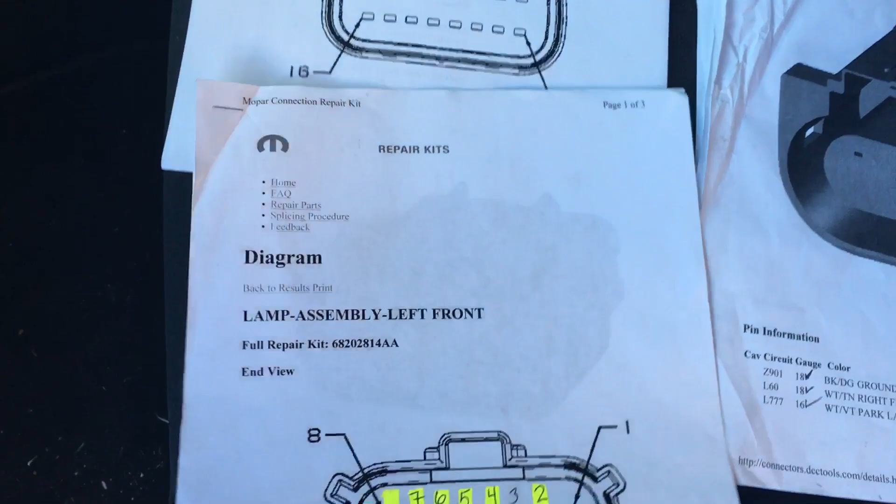I got a lot of requests to do this video, and here's what you're going to need. You're going to need to go into your Dodge dealer, into the parts department, and you want to have the VIN number to any 2015 plus model Challenger.

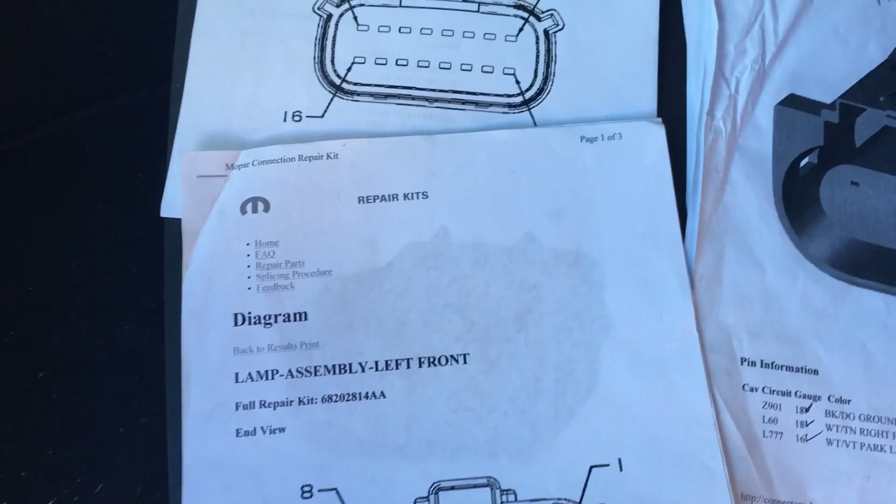It could be a Hellcat, SXT, or RT—whichever one has the same setup as your headlights. Meaning if you have an HID headlight setup, make sure you get another Challenger with a VIN that has HID headlights. Or if you have a halogen setup, same thing.

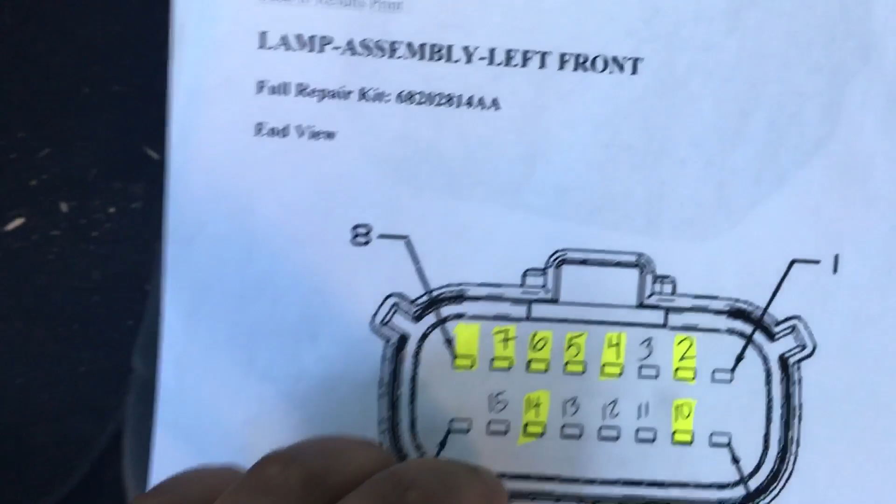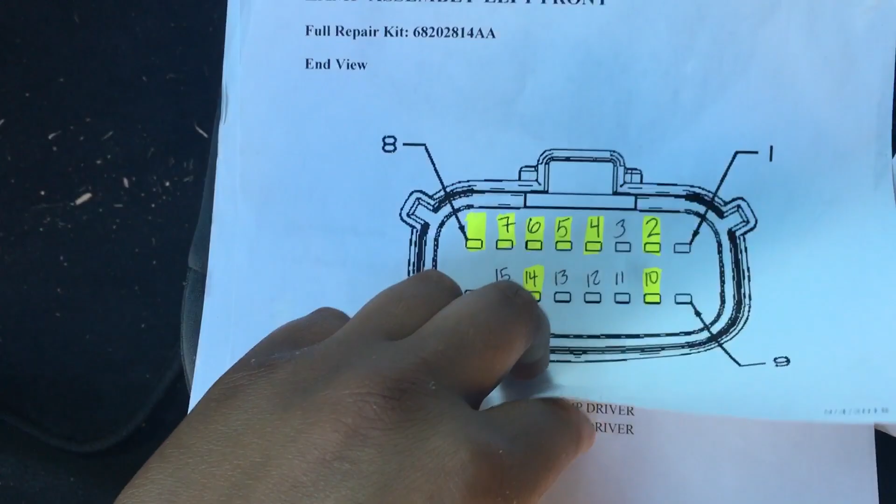You're going to go inside the parts department and look up these parts here. For the headlights, this is for your 2015 plus model Challenger. You want the full repair kit for the headlight. What this does, as I've highlighted here, is give you a breakdown of which each and every wire does for the new headlight, with the color breakdown and so on.

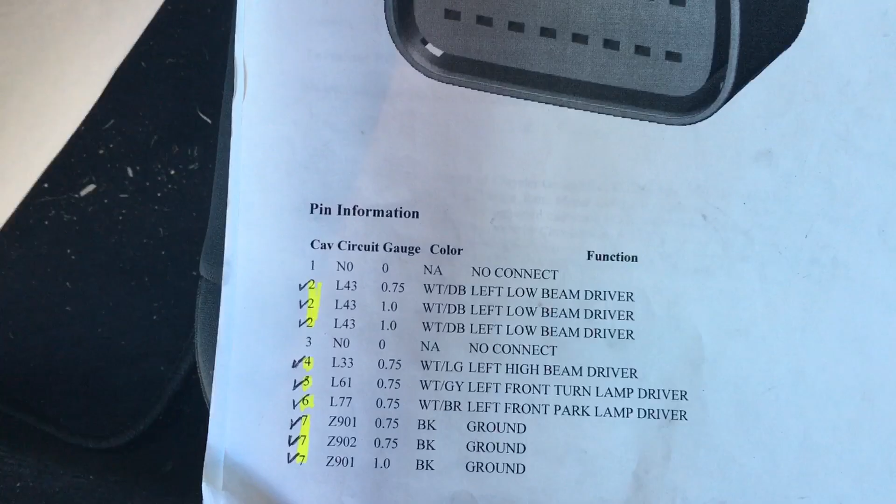I checked off which ones I needed, which ones I didn't, and when I wired it together, I did a little extra check mark to show that I was completed with that wire.

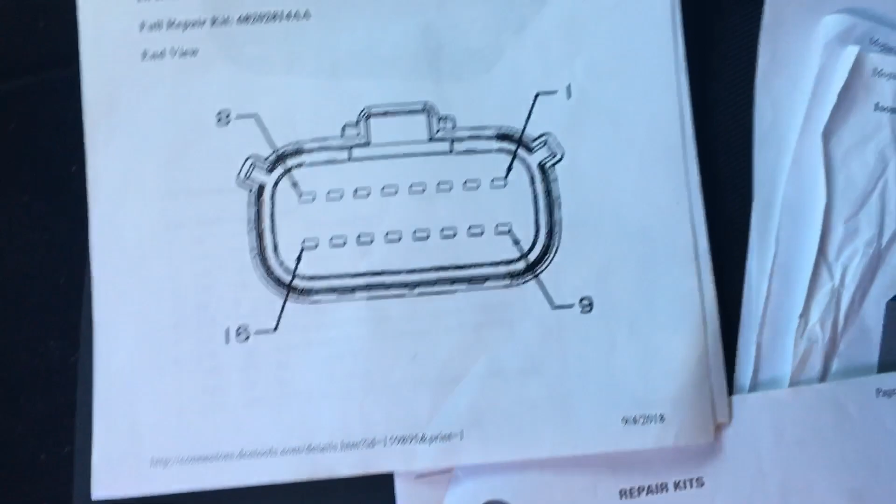So you're going to need the repair kit for the headlights you want to wire to. Then you need the actual headlight assembly, plus your older Challenger's headlight assembly or wiring kit, or repair kit. It's basically a simpler breakdown of which wires do what.

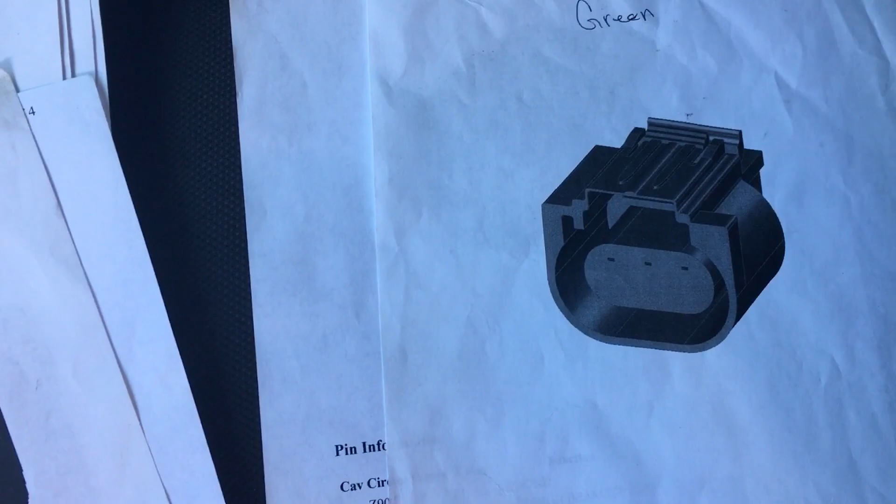Your setup may or may not look like this, but you have a black plug which goes on the front right and a green plug which goes on the front left—or I believe that's how it goes, either front left or front right. You have a black and a green plug that go on the front of your old harness, and these actually go together.

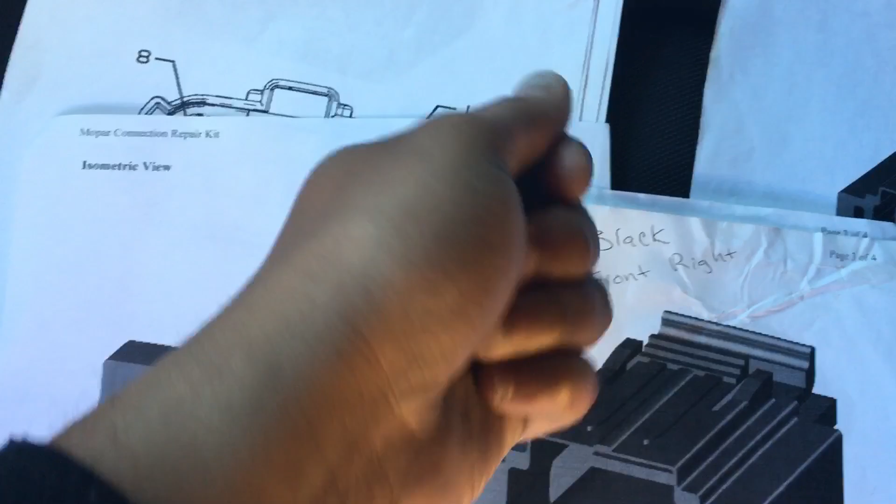One plugs into the amber lights, which are your turn signals, and one plugs into your headlight, which is your high beams and other things. So this is a breakdown of which each plug on each headlight does.

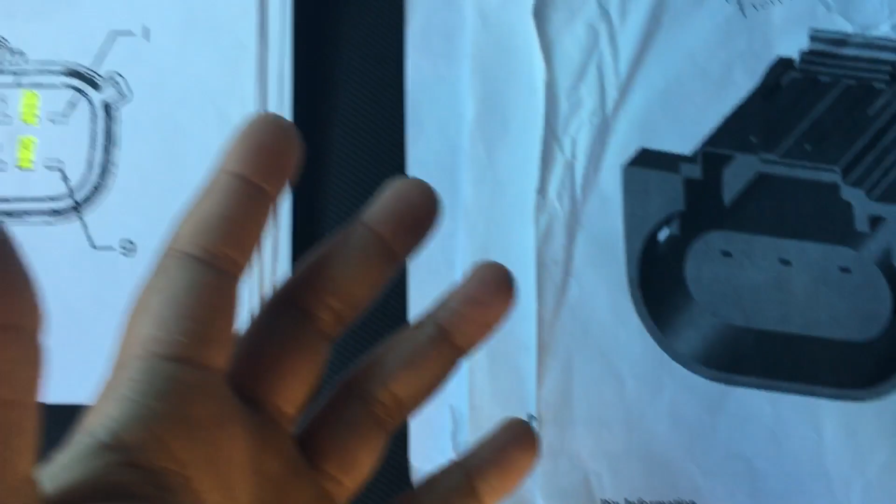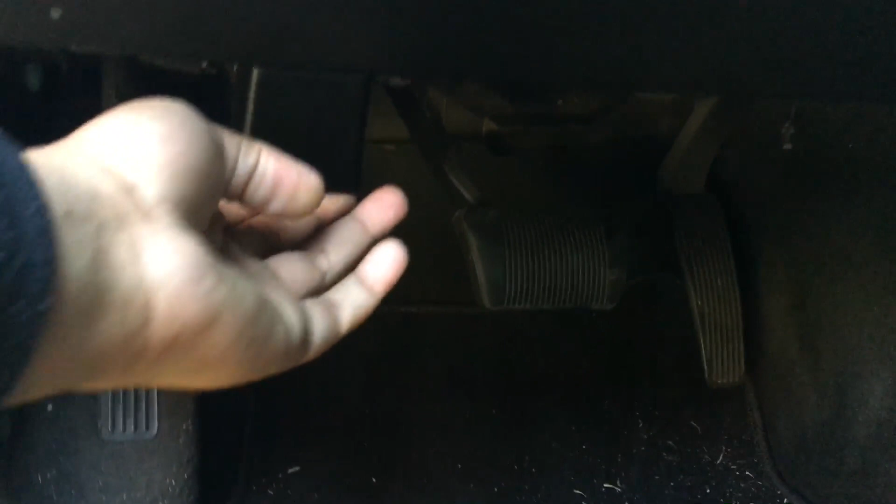I wish I had a picture to show you, but if I do, I'll insert it right here. So I'm going to go ahead and pop the hood to show you what I've done so far, and if you have any questions, I'll do my best to answer them.

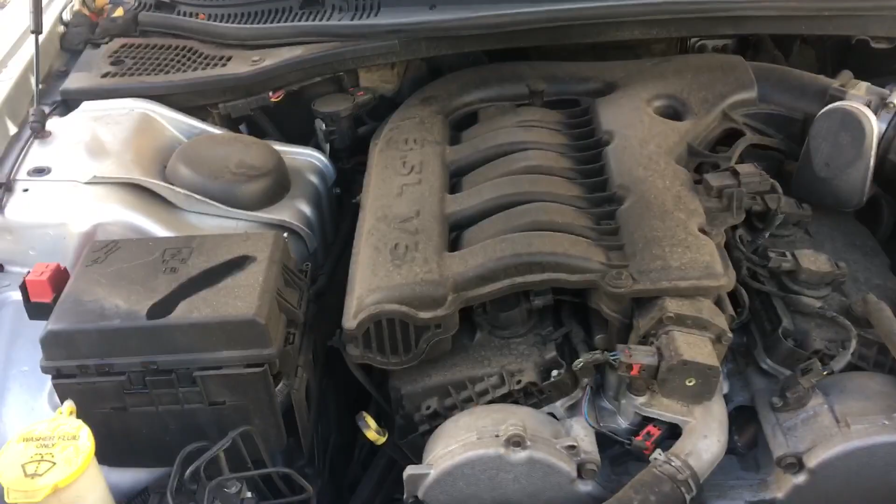It's a 3.5 V6. So you're going to have to move these pieces out of the way. Let's go ahead.

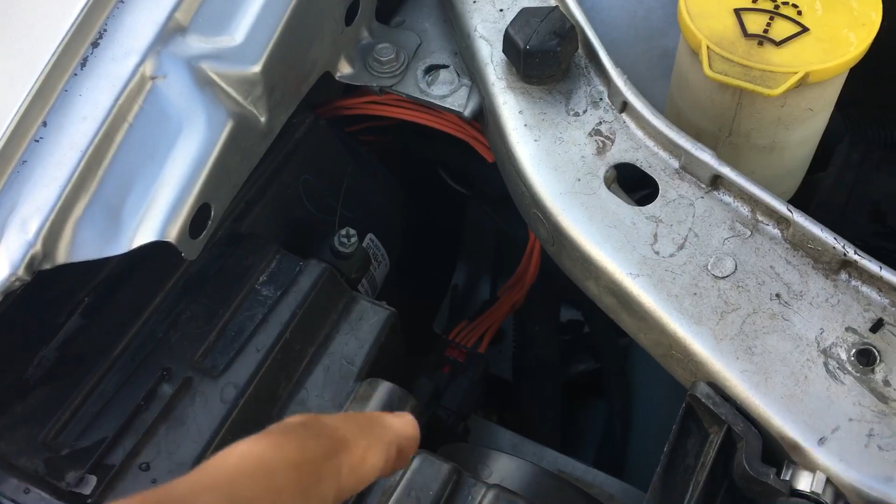What you'll notice is I have some orange wiring here, as well as on this side. That's what I've wired to these new headlight housings. The repair kit will come with only this part, and it'll come with some wires like this that won't be color coded, which is why you need the repair kit to know which wire does what.

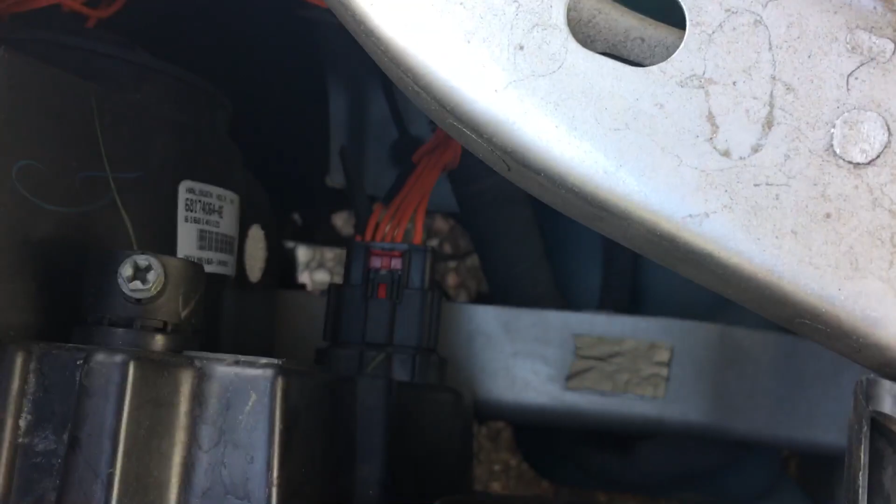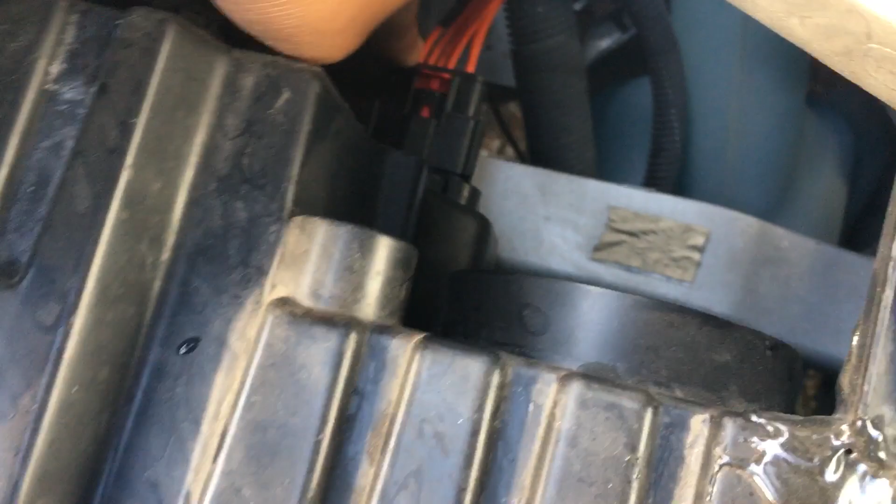You're going to be looking at each wire in each slot, and each one has a different function. For instance, this one could be turn signal, this one could be hazards, this one could be headlight or high beam or whatever. You're going to see what each individual wire does, mark that, and attach them to one another.

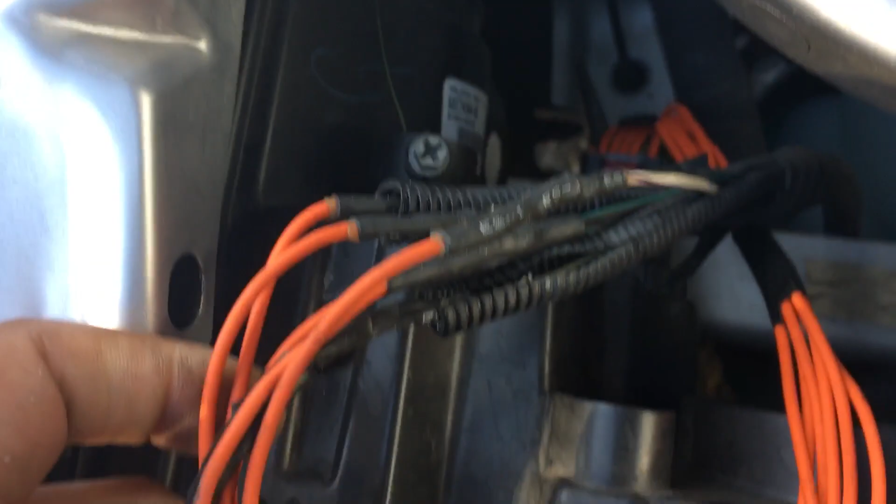As you can see, I have this headlight harness here. And if you watch my previous video, you'll know that, same as the tail lights, you'll have a wire that is basically a fault wire.

That fault wire on the headlight is completely different—you do not want that fault wire attached to any other wiring on your headlight. It'll cause a short. Like right now, the setup I have, it might be just the fuse, but my high beams won't go on.

So when I push my little thing forward on the side of my column—my light, I'm not exactly sure what the name of it is—but anyway, the way you turn on your headlights normally, you have a button to make it go to high beams, or you push the stick or shifter forward to make it go to high beams. Well, when I do high beams, mine cut off.

So to show you that the setup works, I'll go ahead and turn the lights on.

Okay, so I'll turn on the headlights first. It's during the daytime, so there's my side marker, there's my headlights.

Now what you can't see in this video is that there is a ring of light. You might be able to see it, it's flickering. There is a ring of light around each side, so you do have that halo type look when your headlights are on.

Now, a lot of guys like the DRL lights where you can see the halos only. Well, on this, you have to turn it to where the ambers, the old ambers are, because there is no DRL setup for your older Challenger.

So what you'll have to do is turn on the ambers normally, and now you just get that ring. You get that ring there on your headlights.

The only problem with this setup is that your side markers and your tail lights are still on, which kind of defeats the purpose of daytime running lights, which is just headlights or the halos or whatever, the amber turn signals.

So if I were to put on the turn signals or the hazard lights to show you, you can see everything works as it should. Even with the headlights on, there's no short.

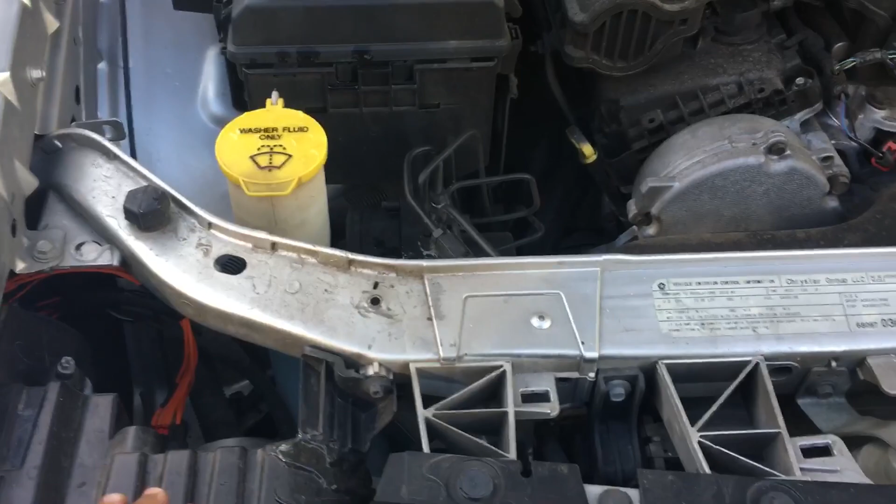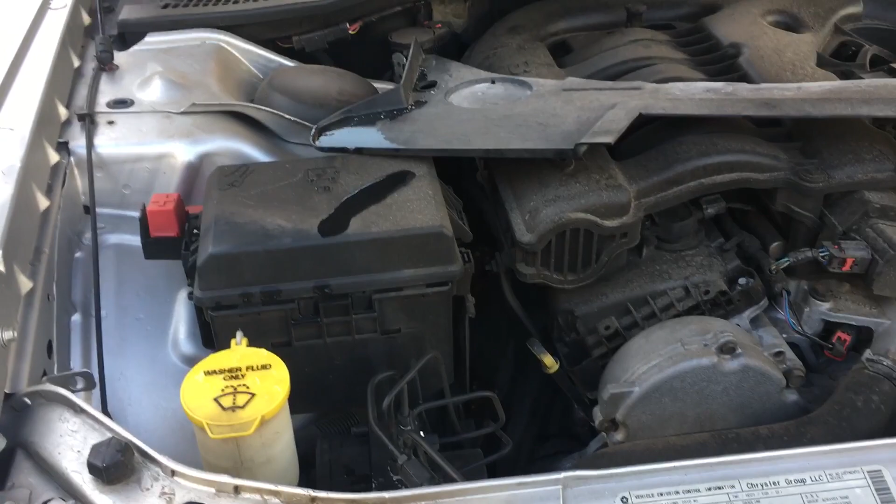There's not enough wiring, nor is the computer smart enough to do a DRL setup as if you have a 2015 plus model Challenger. All that stuff you would have to do custom wise.

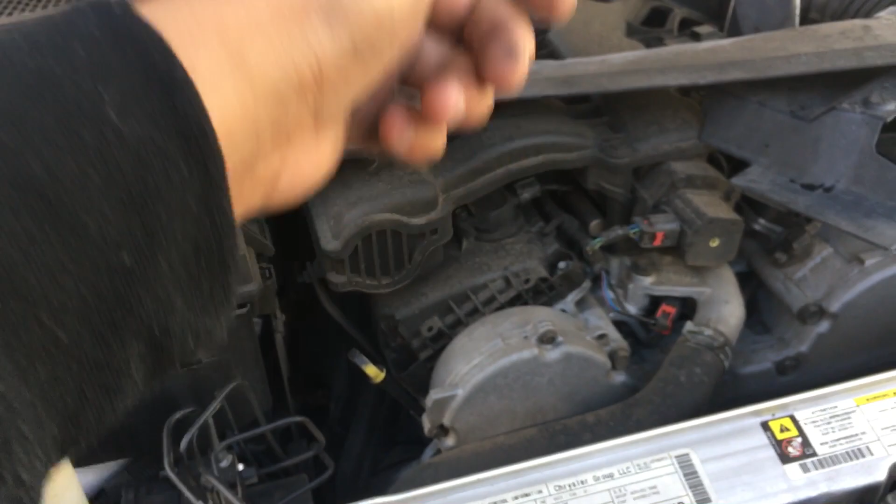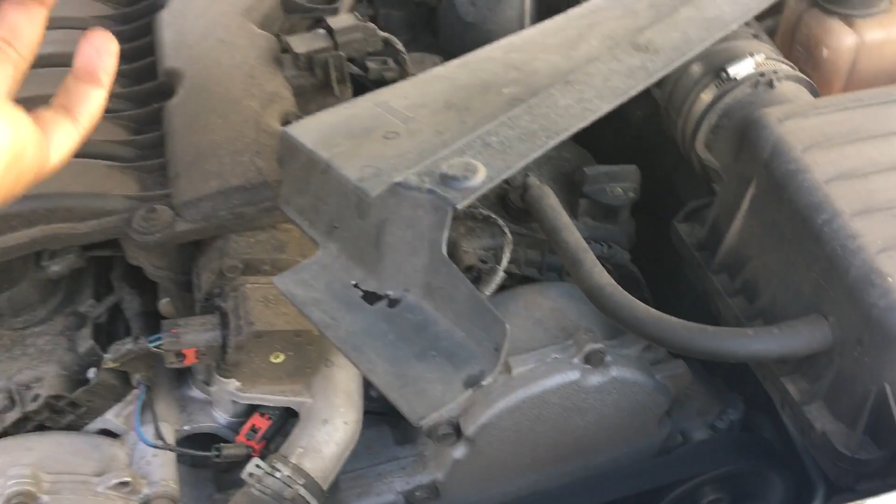So if you want a DRL setup, you're going to have to add in a new switch on your dash that, when you flick it on, goes to DRL and is connected to an accessory wire, so that way it only gets power when the key is in the ignition, or you have some type of power going to accessories, then your DRL will come on.

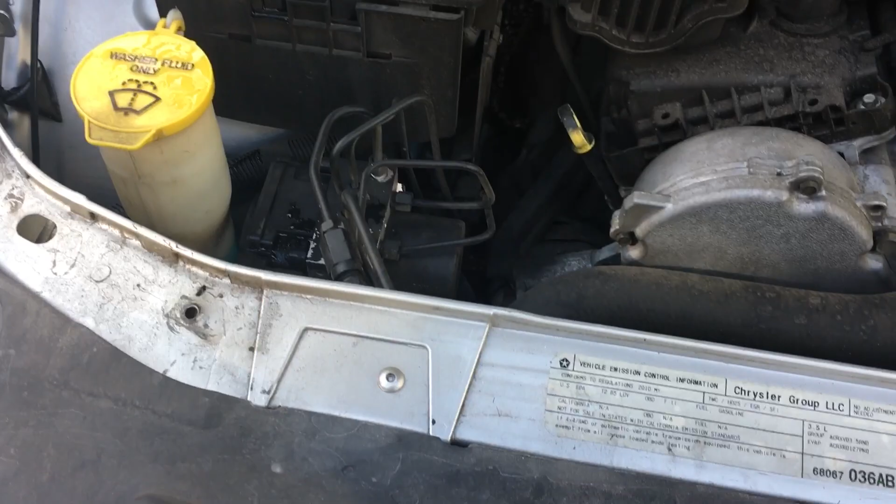But to me, that's a little bit unnecessary. You don't need all that. You want your car to look a certain way, correct? You don't want to buy the new one. Then I think that you've done well in achieving the look.

Let's go ahead and make sure that's in there.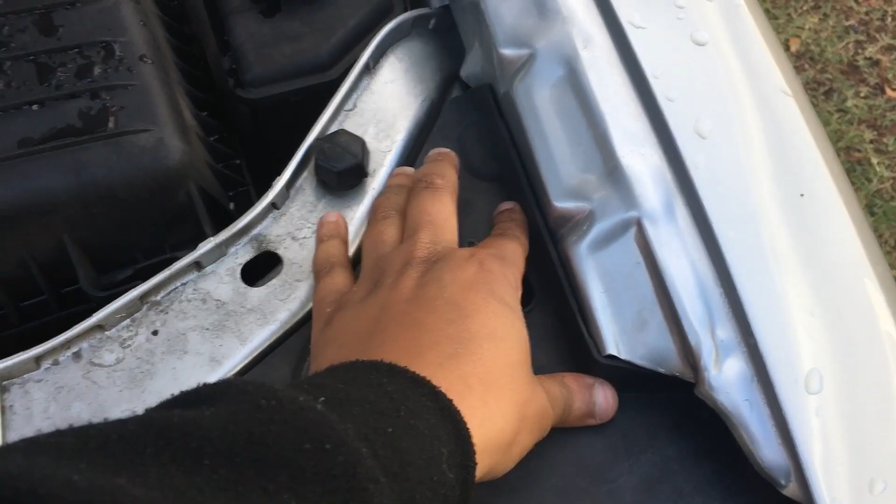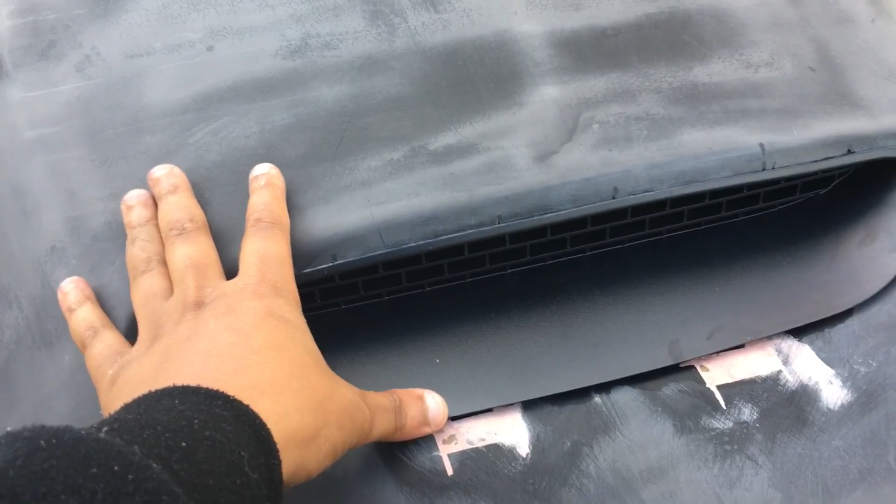Also, I'll probably be doing a video on the hood, how much I got the hood for, where you can get hoods like this, and how, if they're an aftermarket hood, some of the things you're going to have to do in order to make sure that your hood fits OEM, because this one doesn't.

As you can see, the lines are off. Even when the hood is completely depressed, the lines are slightly off.

That's the problem with these aftermarket hoods, is that 9 times out of 10 you're going to need hood pins to keep the hood secured down and also level.

So as you can see right here, if I were to push it down just slightly, you got better lines, at least a better looking line.

As far as this front end, I got it off eBay for about 700 bucks. Very affordable. I'll probably make another video on this later because it was not extremely tough to put together, but it was extremely fragile, as in the clips that are behind it.

I don't know if you can see, but this is a separate piece from this piece, obviously, and you clip them together, but the clips are very flimsy and fragile.

So there was times where I had to use a screw in certain areas. I don't know if you can see it. You can't. Okay, so there's a screw where it would clip in.

It's like I had maybe 3 or 4 clips that broke on this front end, and I had to use a screw, and I just screwed it in there to hold both pieces together. And so far so good.

I've had this front end on for, I'd say, a little bit over a couple months now, maybe 2 months or so. The reason why I haven't finished fitting it completely here is because I'm still not finished with the inside of this.